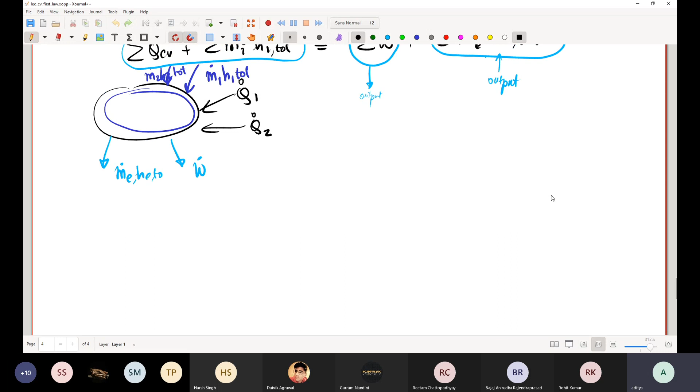Yes sir, visible. Okay, so yesterday we discussed the first law for control volume and mass conservation, which is trivial. So now we will move on to steady state processes.

Okay, so steady state processes, this kind of assumption is true for a majority of devices such as turbines, compressors, nozzles, boilers, heat exchangers, and so on. So what is the common theme for all these devices which operate at steady state?

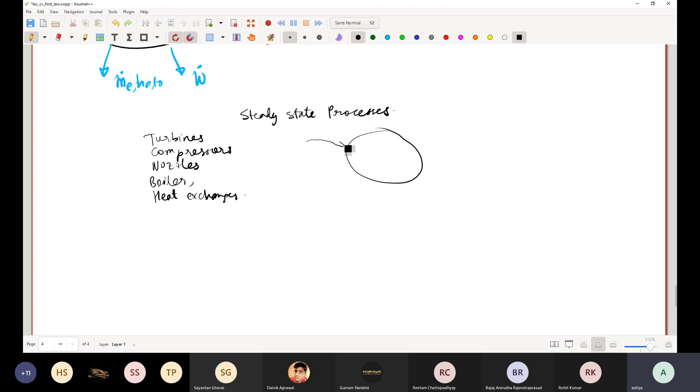There is some mass flux coming in, it could be multiple sources, and there is some mass flux going out, and these mass fluxes are constant. The mass fluxes are constant, meaning they do not change over time.

If they do not change over time, there will be no rate of change of mass in the control volume as well. If we say that something does not change in time, d/dt of that quantity will be 0. So in that case, we will say that the system is operating in steady state.

So imagine for a turbine, and we have seen this yesterday also. There is some mass stream coming in, there is some extraction, there is something which is going out, and these mass fluxes do not change.

For a turbine, it may change when, say, the power plant is shut down, for example. Okay, so there are a host of devices, and so we will have certain assumptions also built in.

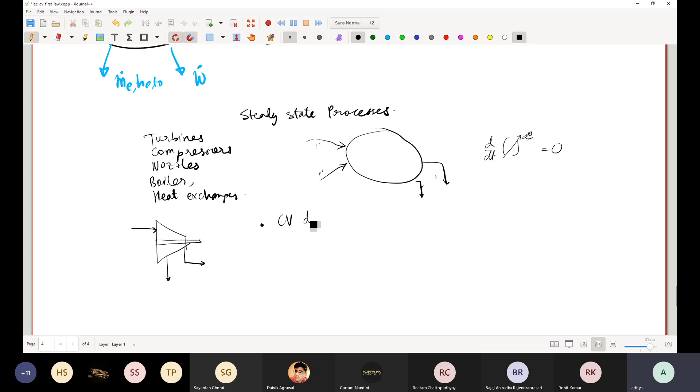You will see that in majority of the problems, the control volume does not move, mass inside the control volume does not change, and the mass fluxes coming in or going out of the control volume also do not change in time.

When these are sort of valid, then we say that the process is in a steady state, steady flow process. Also it's steady state, steady flow. SF is steady flow.

So steady flow is this assumption, because the mass of the control volume can also not change when the inlet flux and the outlet flux change in time, so that the difference is 0. This can also happen. So to avoid that extra ambiguity, we will have the third assumption also coming in, that is steady flow.

Okay, so let's do some examples. And as I said, the examples are really easy. I mean, the problems in all of this, they are very easy, but the only point is you must practice.

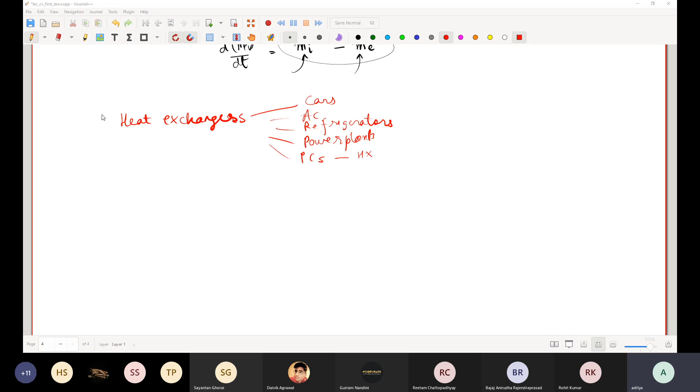So let me show you how it actually looks like. Let me just paste an image. A heat exchanger looks something like this.

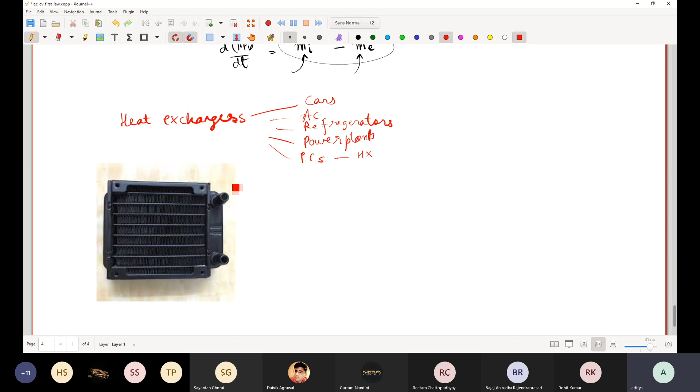So this is a kind of heat exchanger where hot liquid comes in, cold goes out. And how is the hot liquid cooled? By means of cooling air which blows over these fins. You will study it in heat transfer, that when you blow air over these fins, the air takes up the heat from the hot liquid and becomes hot.

But there can be different kinds of heat exchangers as well. This is what goes on in a PC, a personal computer. You have the CPU water block, and because of the heating of the CPU, the water inside the water block becomes hot.

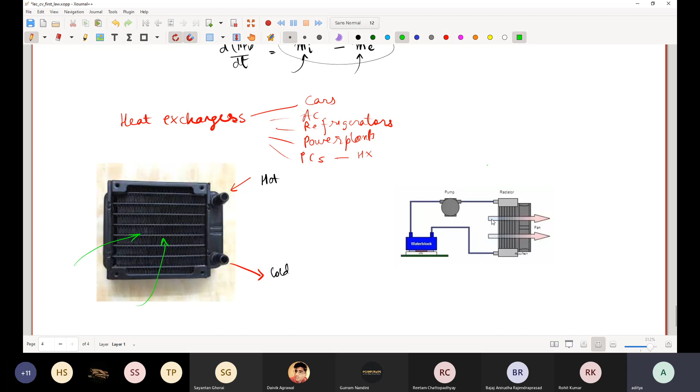So the pump simply pumps the hot water to the radiator, where a fan draws in air. It draws cold air, and because the cold air will pick up heat from the hot water, the air will become hot, but the liquid will become cool. Okay, this is how it looks like.

But here in both the examples we had air, but you can imagine that instead of air you could have cooling water as well. Instead of air blowing over this, you could have cold water coming in and hot water going out. So let me draw a schematic of it.

So you have cooling water in, and cooling water will flow in this space, where the tube isn't. This tube I have just shown schematically, like a coil. Cooling water will flow over the coil and exit. But hot refrigerant will go through the tube - this is the kind of tube you see at the back of old refrigerators. It will go in the tubes and exit. So what happens? The cooling water picks up heat from the hot refrigerant, and so the cooling water becomes hot, but the hot refrigerant becomes cold. It is as simple as that.

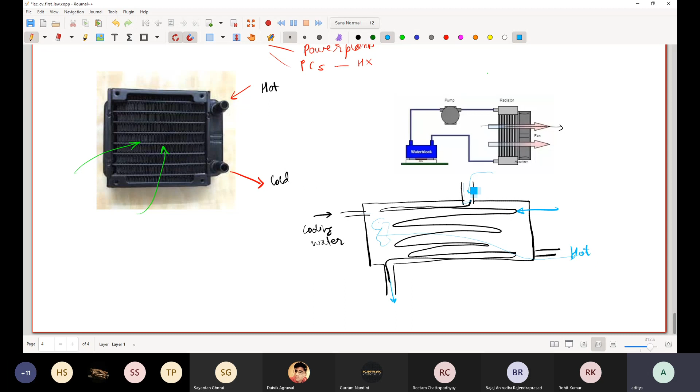So let's do a problem. Once we do the problem, it will be immediately clear.

Internally you have those tubings going on so that the two liquids do not mix. So in the problem, it is given that we have a water cooled condenser, in which R134A is the refrigerant, and the refrigerant enters the condenser at 1 megapascal, 60 degrees Celsius, at a rate of 0.2 kg per second, and exits the condenser as liquid at 0.95 megapascal, 35 degrees Celsius. The cooling water enters the condenser at 10 degrees Celsius and exits at 20 degrees Celsius. This is water, and this is R134A.

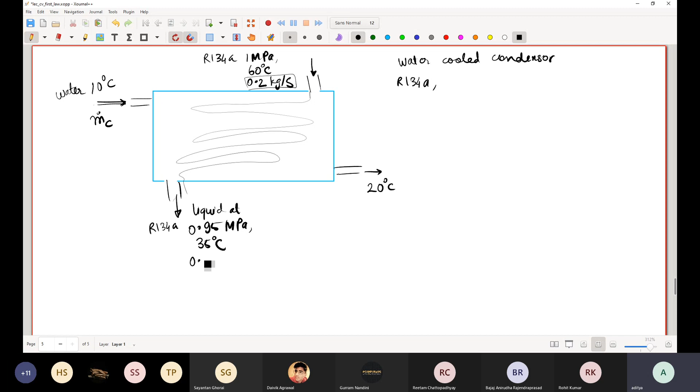So first things first, the mass flux of R134A in the system is going to be fixed. So whatever R134 is coming in at this section is the same flux going out. There is no reduction in mass flux because it's a single pipe, and that is why there will be no change of mass. Similarly, whatever mass flux of water is coming in is going to be the same mass flux of water going out.

Now let us consider this as the control volume. For this particular control volume, we can now write down all the different conservation equations. So first, conservation of mass.

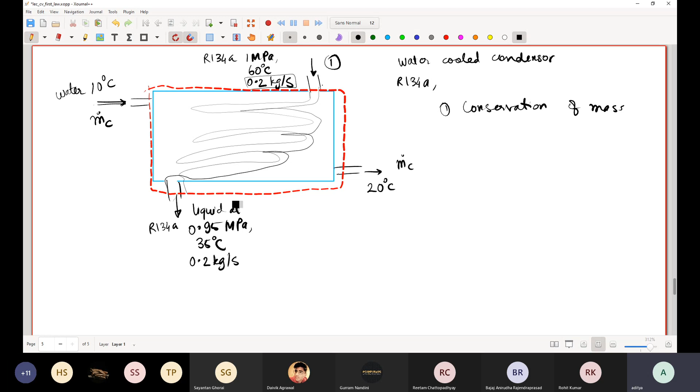Let me call this 1, let me call this 2, let me call this 3, let me call this 4. So m dot 1 minus m dot 2 minus m dot 3 minus m dot 4 is equal to dmcv/dt, but this is a heat exchanger, it's a steady state steady flow process, so this becomes 0. So what do we have? We have m dot 1 plus m dot 2 is equal to m dot 3 plus m dot 4, but... oh what have I done, this is all incorrect.

Conservation of mass I have written down, let me write it down. Mass in will be m dot 1 and m dot 3. So m dot 1 plus m dot 3 minus mass going out, which is m dot 4 and m dot 2, is equal to dmcv/dt, but because of steady state steady flow this will be 0. Therefore m dot 1 plus m dot 3 is equal to m dot 4 plus m dot 2. But we have already seen that because the pipeline of R134A internally is different from the pipeline of cooling water internally, m dot 1 will be equal to m dot 2, and similarly m dot 3 will be equal to m dot 4. So m dot 3, m dot 4, m dot 1, m dot 2 cancel out. So mass conservation is trivially satisfied. Mass conservation is trivial, no problem. Now with that in hand, we are in a position to write down the conservation of energy.

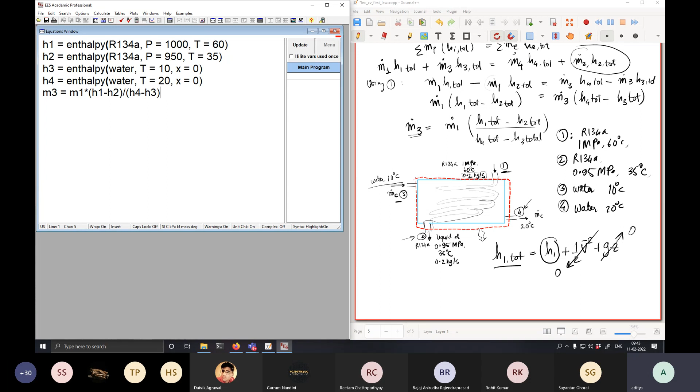So M3 will be M1 multiplied by H1 minus H2, divided by H4 minus H3, where M1 is given as 0.2 kg per second. Let me run this program. So M dot 3 comes out as 0.9191, and the answer matches exactly with the textbook. So this is the mass flux of cooling water that you must have in order to cool R134A from 1 megapascal, 60 degrees Celsius, to 0.95 megapascal, 35 degrees Celsius.

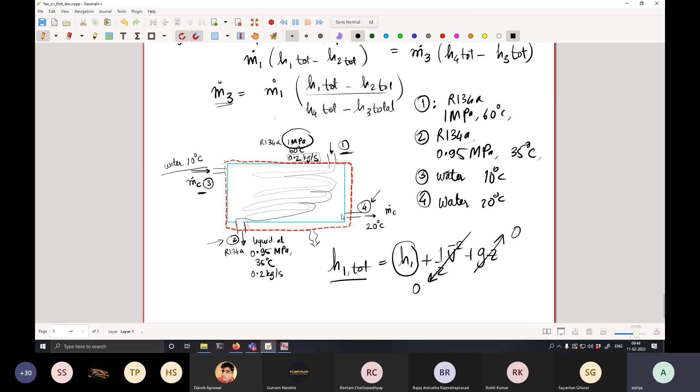Now look over here. Ideally, heat exchangers are devices where the pressure drop is negligible, and the pressure drop is in fact negligible. The pressure drop for R134A goes from 1 megapascal to 0.95 megapascal. So what exactly is going on? You are essentially losing out on 50 kilopascal. Why is that? Who can tell why we are losing pressure from 1 megapascal to 0.95 megapascal? You have essentially lost 50 kilopascal, which is not a lot, but why have we lost it? Anyone?

Viscosity? Yes, I mean it's due to the pressure losses because of the fluid flow within pipes. So essentially it's caused by viscosity.

Okay, very good answer. So this is the kind of engineering sense one must have when defining this. The longer the pipeline you have, the larger the losses you will have. That is why with heat exchangers, the designer has to account for the fact that when the liquid comes out, it will be at a slightly lower pressure. So that's what you do with heat exchangers.

Next, we have the nozzle. So let me tell you what a nozzle is. A nozzle is a static device which is simply a converging-diverging section. This is the converging section, this is the diverging section. This kind of nozzle you will find in jet engines, and many other devices as well, but most prominently you might have seen it in photographs of jet engines. So what is the task of the nozzle?

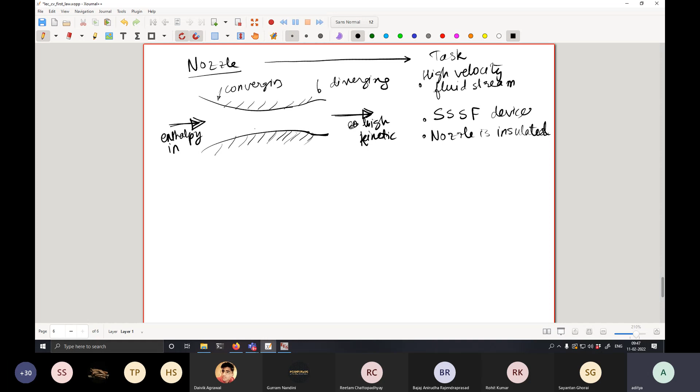And a nozzle is typically insulated unless otherwise specified. There might be problems where you have a non-ideal nozzle and there is some amount of heat transfer from the nozzle to the surrounding. In that case, you must be in a position to appropriately modify the first law of thermodynamics to account for that non-ideality. Let us consider this as the control volume.

So first things first, mass conservation. What about mass conservation? Is it ideal? Is it trivial? Yes, it is trivial. Why is it trivial? Because there is only one mass coming in, m dot i, let's call it, and this is m dot e. So m dot i simply is equal to m dot e because it's a steady state, steady flow process. Is that clear to everyone? Mass conservation is trivial for a nozzle.

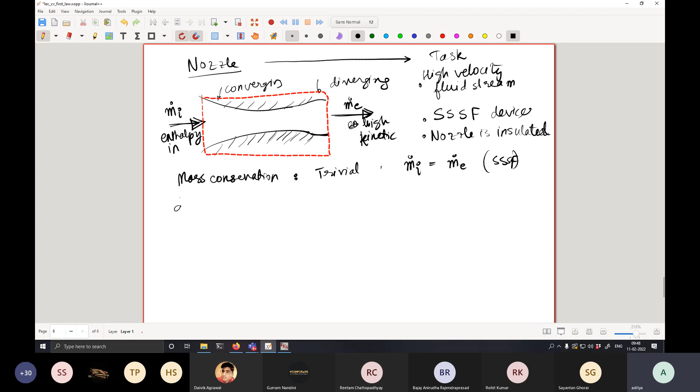Now let us write down the first law of thermodynamics. So we have dE_CV/dt is equal to the summation of all heat fluxes minus the summation of all works plus the summation of all inputs bringing in total enthalpies minus the summation of all exit masses taking out all the total enthalpies. Because it's a steady state, steady flow process, this vanishes, this vanishes.

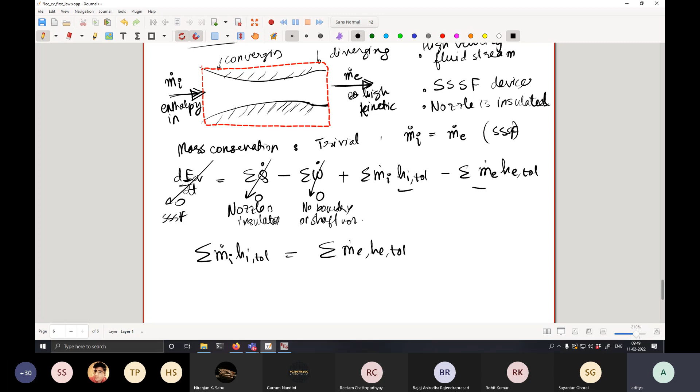So essentially you are left with 0 equals this minus this. So much like the heat exchanger, summation m dot i h_i,total is equal to summation m dot e h_e,total. This was the same case for the heat exchanger as well. But here there is only one mass stream, so you will say m dot i h_i,total is equal to m dot e h_e,total. But we have already seen that because there is only one inlet and exit, mass conservation is identically valid, so m dot i and m dot e are equal, they cancel out, leaving us with h_i,total is equal to h_e,total. This means the incoming total enthalpy is equal to the outgoing total enthalpy.

Now what is the incoming enthalpy? It will be h_i plus half v_i squared plus g*z_i, and the outgoing enthalpy will be h_e plus half v_e squared, where these v's are the velocities, plus g*z_e. Now because the change in potential energy in going from the inlet to the outlet is negligible, we can simply cancel these out.

So these terms are cancelled because the change in specific potential energy is 0. The change is 0 - I'm not saying the absolute value is 0. This nozzle could be at a very high altitude, and correspondingly it can have a very high potential energy. But during the process, going from inlet to outlet, the change that the fluid experiences will be equal to 0. Therefore we can cancel out these two terms.

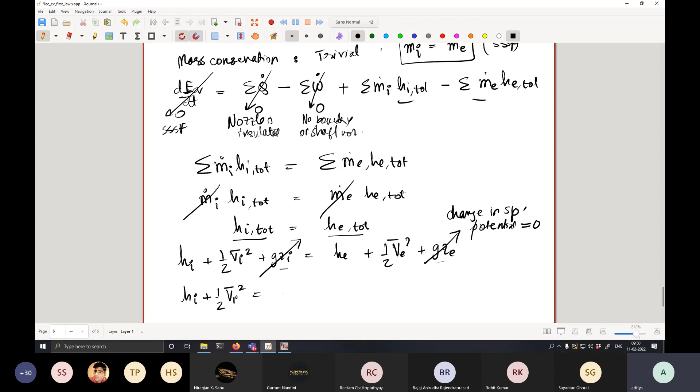So we have hi plus half vi squared is equal to he plus half ve squared. That is the entirety of the derivation for a nozzle. This is what you will use for a nozzle. Let us do a small problem.

The problem states the following: steam, so this is the inlet line and that is the outlet line. The incoming line has steam at 0.6 megapascal and 200 degrees Celsius, and it enters into an insulated nozzle. This nozzle is insulated, it is given in the problem. And it exits.

The question is, determine the final temperature. It is given that the exit velocity and the exit pressure are this. The question is, what is the final temperature, if the steam is superheated? So first of all we have to find out the final temperature. The second part of the question we will come to later on.

Okay, so hi plus half vi squared - vi we have over here. So let's do that. A word of caution: this is the place where many of you might make a mistake. When using units, hi, the unit is what? Kilojoule per kg, isn't it?

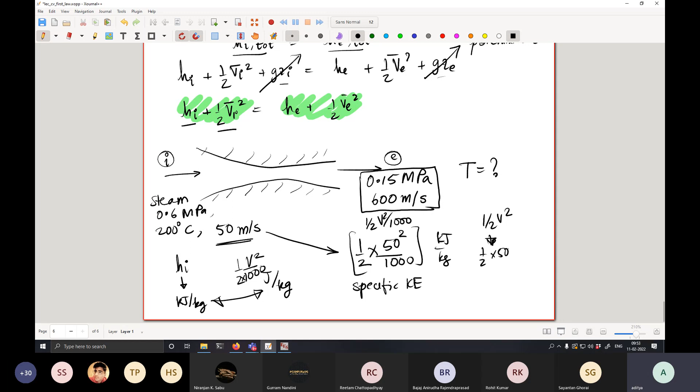So in this case, the specific kinetic energy will be half into 50 squared over 1000. This is the specific kinetic energy, and the units of this now are kilojoule per kg. But if you only use half v squared, you would have half into 50 squared, and the unit of this would be joule over kg. So if you try to add something which is kilojoule over kg with joule per kg, you are going to get incorrect answers, solely because there's a factor of 1000 missing from either of the terms.

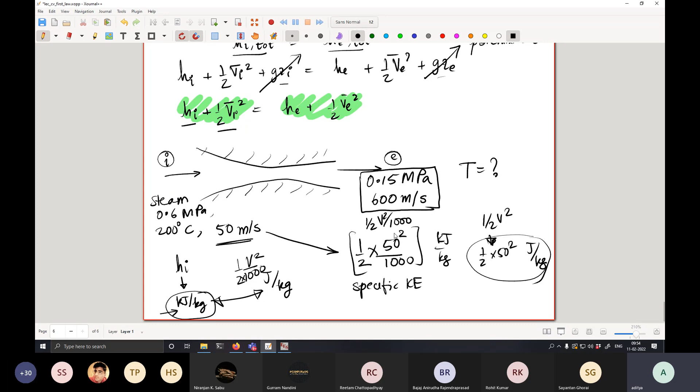Either you can convert this to joule per kg, which is not so convenient because all the other quantities in the tables will be reported in kilojoule per kg. So it is worth your time to convert the specific kinetic energy head into kilojoule per kg rather than doing anything with the specific enthalpy units. Is that clear, everyone? It's simple, but I just thought it needs to be said. Most likely many of you might have figured it out as well. Is that clear?

Yes sir. So hi plus half vi squared over 1000 is equal to he plus half ve squared over 1000, where hi is at 0.6 megapascal, 200 degrees Celsius. This vi is 50 meter per second. He I don't know. Ve is 600 meter per second. So let us plug in the numbers and let us see what he is.

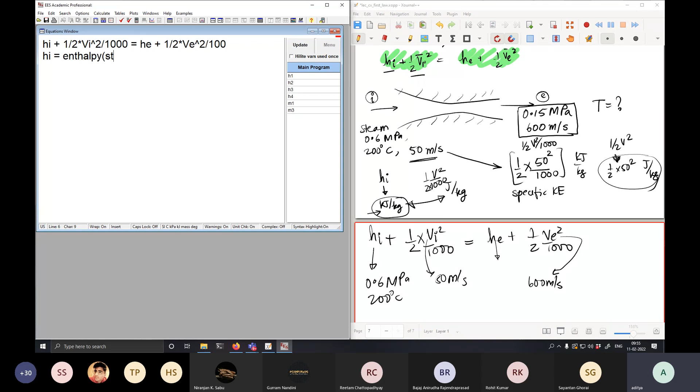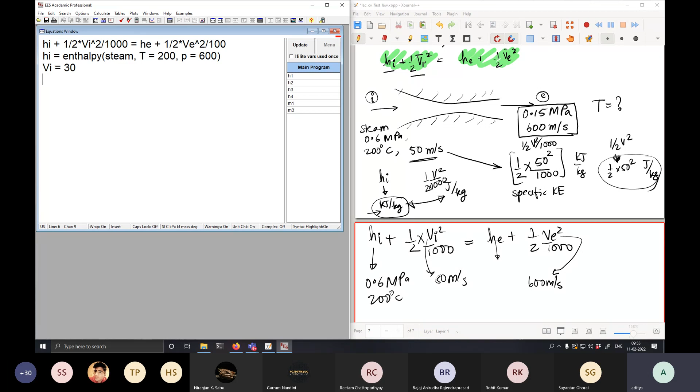Okay, so I will say hi plus half into vi squared over 1000 is equal to he plus half into ve squared over 1000, where hi is the enthalpy of steam at T equal to 200, P equal to 600, and vi is going to be 50 and ve is going to be 600. So let us run this. So we get an exit enthalpy of 1051 kilojoule per kg.

It is also given that the outlet state is at 0.15 megapascal, so the exit pressure is 0.15 megapascal. We have already seen in chapter 5 that enthalpy and pressure can be used as two independent quantities to determine the other properties.

Sir, I think you divided by 100 instead of 1000. Ah, thanks for pointing it out, let me just make amends over here. Sir, also is Vi 30 or 50? Wasn't it 30? Oh, it was 50, my bad.

I'll just change it. No problem.

So the exit enthalpy is 2672. Let's write it down: 2672 kilojoule per kg. Good, at least you're attentive. You're more attentive than me. That's always a big plus.

Okay, these are the exit quantities that we have. Like I said, we can use enthalpy and pressure to determine any other property that we want, like specific volume, temperature, internal energy, if one were inclined to find that. So now we will find the exit temperature. T exit is the temperature of steam at H equal to 2672 and P equal to 150. Let me run this. So with this, we obtain an exit temperature of 111.3 degrees Celsius. So the final temperature is 111 point this.

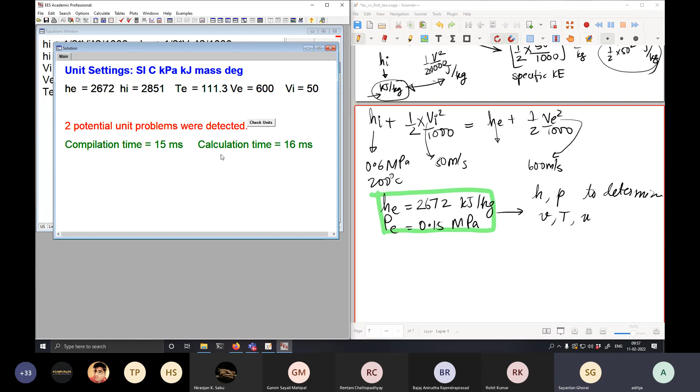Check the difference. Sir, I have a doubt. In this case, it is mentioned that it was steam, like we know its quality is one. No, we don't know the quality is one. Nowhere have we assumed that the quality is one. I thought it was, and that's why I got an ambiguity. No, there is no such assumption. We have never said it's superheated or subcooled or saturated. Let's see, if you have a doubt, let's check.

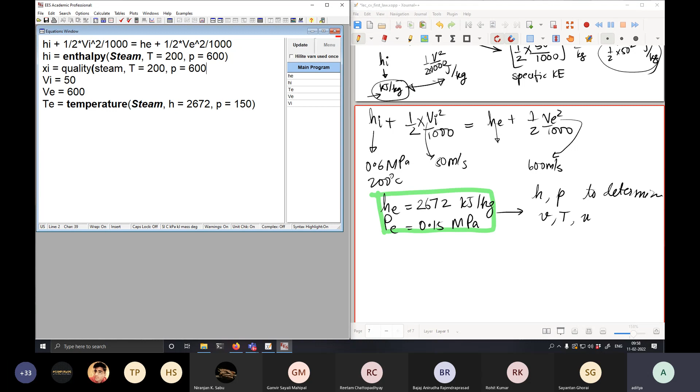Quality steam, T equal to 200, P equal to 600. Let's see what state it is. So the incoming quality, Xi, is 100, meaning it is superheated steam.

Hello, sir, but the outgoing is not matching. I checked at P equal to 150 and X equal to 1, the enthalpy comes out to be a little bit different.

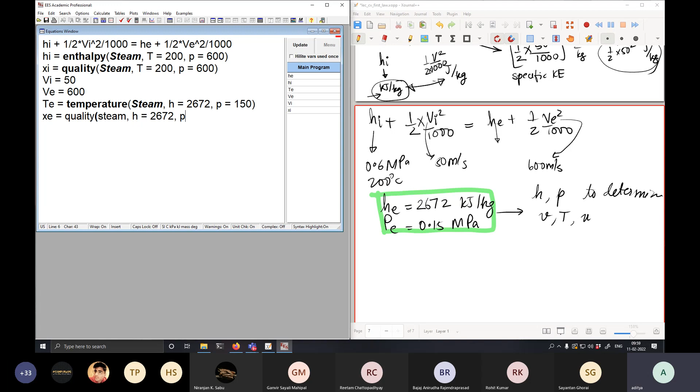Let's see what the outgoing quality is. So the outgoing is 0.9905. So it's just at the saturation point. Yes, sir, one moment.

Yeah, hello. Sorry about that.

So the exit quality is very near to the saturation dome, and in the book also it is given as 0.99, which is correct. Hello, Sayantan, yes sir, it is clear. For everyone else, regardless of what value you get, it's just a matter of what the internal offset of the software is. Don't worry about absolute values ever. To everyone, you should get 0.99.

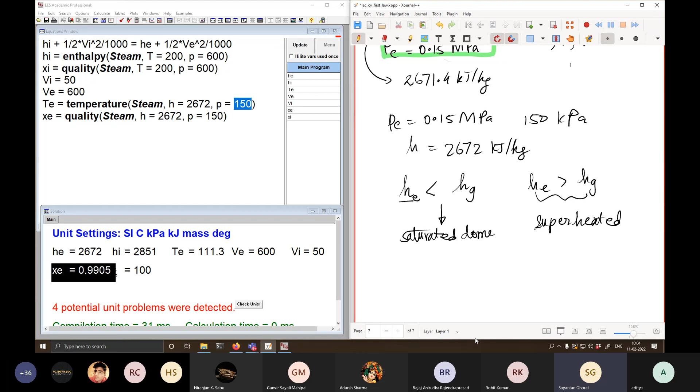Sir, I had a doubt not related to thermodynamics. How does this EES work? It is not following the normal flow of code. In the previous problem, you followed a pattern, but the value was calculated in the end, while the formula was used before that. So it compiles everything afterwards, it doesn't interpret line by line. It takes all the variables, it sees what all things it needs to solve. In fact, there is something even funnier that it does.

Let me show this, it's just for fun. You should not do it because things may go wrong, you should not do all this, whatever I'm trying to show you. So, suppose h temp is 2672. Then I say h temp equal to enthalpy of steam at T equal to T unknown, P equal to 150.

Ideally, it should be able to solve this as well. No, no, no, no. Oh, I see where the error has come. T and P I'm trying to fetch to get enthalpy, but T and P cannot be used simultaneously inside the saturated dome, so it throws an error. But had it been in superheated, let me just put this, then it would give some answer. But the property is probably incorrect, so I need to go to a lower pressure maybe.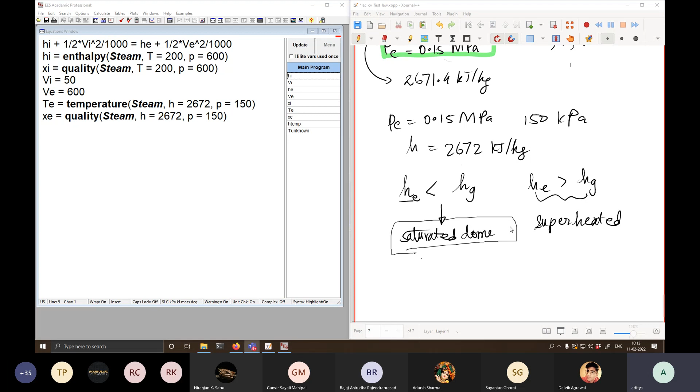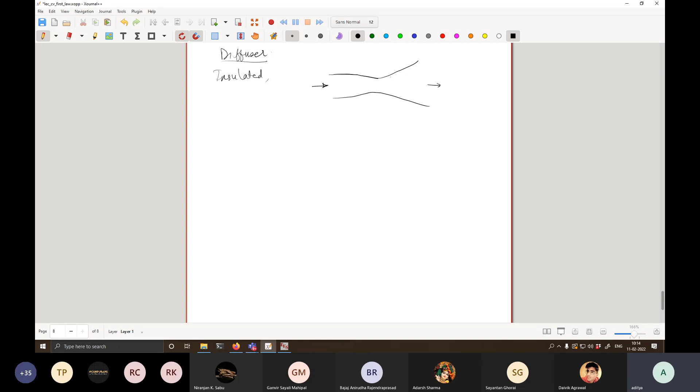Okay, we're back. So then a diffuser is a similar item where you have a converging section and a larger diverging section. It's the reverse of a nozzle. So diffuser is also insulated, and it makes use of the fact that high kinetic energy is coming in and you want to convert it into enthalpy. This kind of thing you will also see in jet turbines, but the analysis remains the same. So the next thing, we'll not discuss problems of this, it's very simple, it's the same idea as before. So throttling.

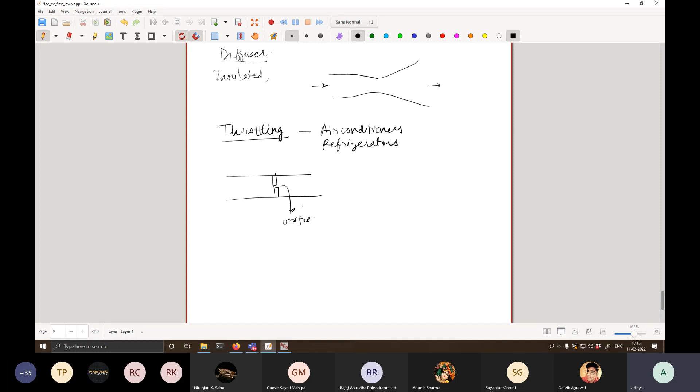Throttling is a very common process in air conditioners or refrigerators. It's very simple in the sense that in the tube you will have a small orifice. This is the orifice. And if we imagine this to be the control volume...

If you imagine this to be the control volume, the process of throttling happens so fast that there is no chance for the refrigerant, which is entering at a certain enthalpy, to lose heat to the surroundings. The throttle valve is also packed with thermocol, so it's insulated. So the throttle is insulated.

Also, during this process the upstream velocity - look at this, I have not drawn the control volume very close to the orifice, I have drawn it far, close to the control surface and rather away from the orifice. At the inlet control surface and at the outlet, the velocities are the same. Why are the velocities same? Because the mass flux is still maintained. So when the velocities are same, rather let me put it this way, the difference in specific kinetic energies is negligible. In that case, the enthalpies will remain constant.

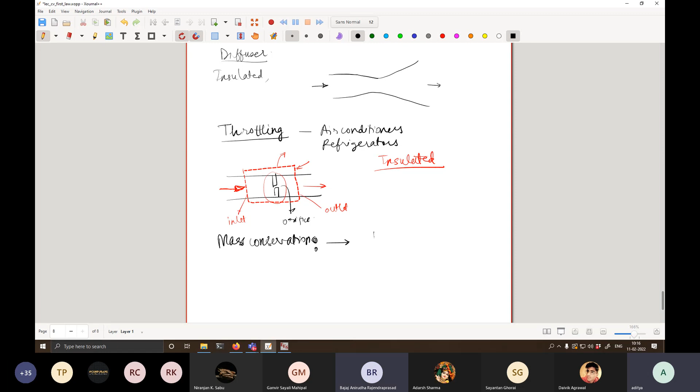Let's derive this. So mass conservation - what is mass conservation again? Is it trivial or not? Only one inlet, only one exit. Is mass conservation trivial? It is trivial. And it's also a steady state, steady flow device.

So we have dECV/dt equals summation q dot minus summation w dot plus summation m dot i hi total minus summation m dot e he total. There is no heat transfer, there is no work done. It's a steady state, steady flow device. So again you end up with the same formula: m dot i hi total is equal to m dot e he total.

So let us write down the expression for this, and mi and me they cancel out because from mass conservation we would have m dot i equal to m dot e. So by virtue of this, these two terms cancel out. So hi total will comprise of hi plus half vi square plus gzi, and he total will comprise of he plus half ve square plus gze. Now there is no change in specific potential energy and no change in specific kinetic energy, so these terms cancel out. They are not negligible, they cancel out, meaning the change is zero.

I have not cancelled them individually, I have cancelled them in pairs because half vi square will be approximately equal to half ve square. There is a difference - I hope everyone is able to understand that. I am not saying half vi square is equal to zero, I am saying half vi square is approximately equal to half ve square. That is why I have cancelled them out.

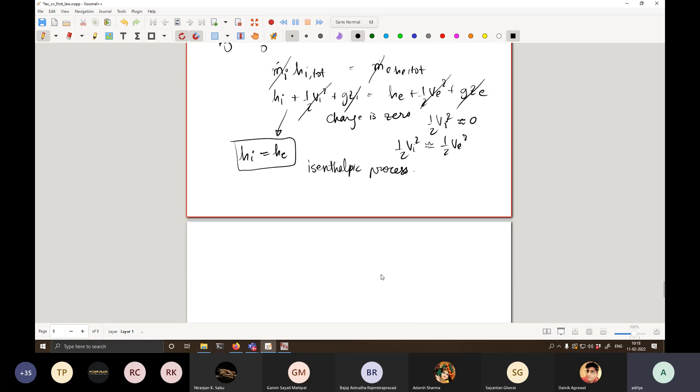It's very simple. So with that in mind, let's do a simple problem. So we have a capillary tube throttling device. It's also called an expansion valve, and in refrigerators it's also called a capillary tube. Basically it has a very small diameter, so it's an expansion valve or a capillary tube as well. So what is given?

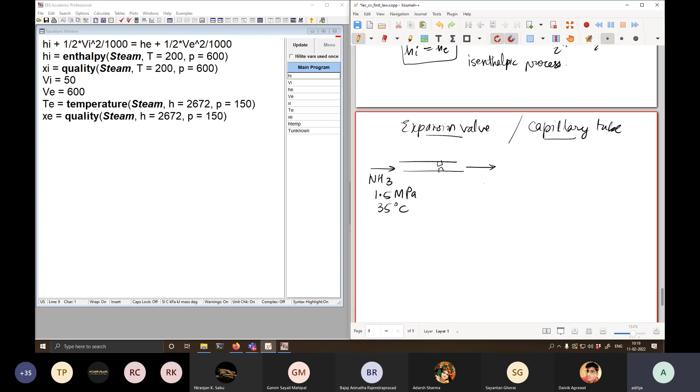In this you have ammonia as the refrigerant, which enters the expansion valve at 1.5 megapascal and 35 degrees Celsius, and it exits the expansion valve at 291 kilopascal. The question is, what is the quality of ammonia going out? Let's see how we can do it.

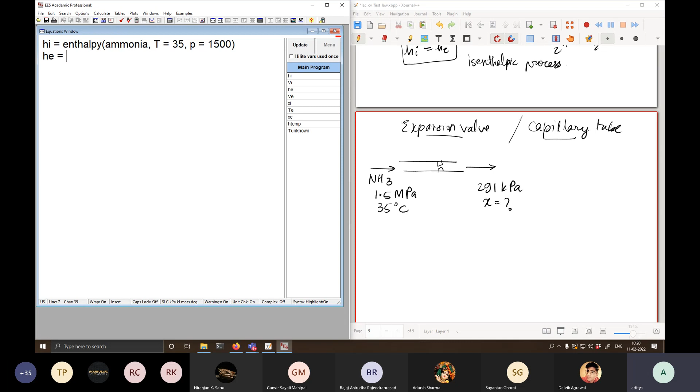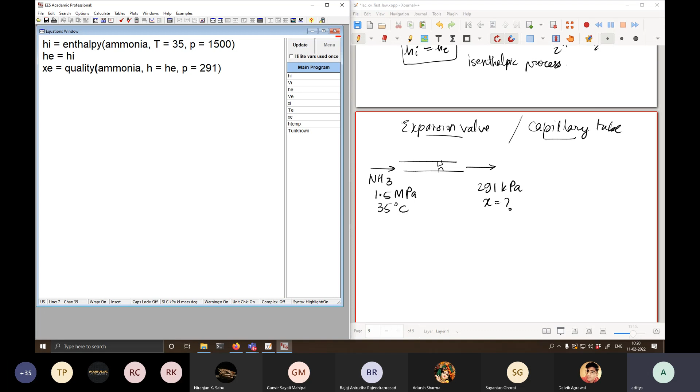It's very simple. So we will say HI, the incoming enthalpy, is the enthalpy of ammonia at T equal to 35 and P equal to 1500. We will say HE equal to HI because the exit enthalpy equals the incoming enthalpy. Finally, X exit is the quality of ammonia at H equal to exit enthalpy and P equal to 291 kilopascal. When we run this, we obtain a quality of 0.1636. So the quality unknown is 0.1636, and the answer given in the textbook is 16.38%, which is fine - fourth decimal place we have some difference.

The problems of expansion valves are as simple as that. They are isenthalpic processes, that is, the enthalpy upstream and downstream remain the same. Any doubt in this so far?

No sir, so I have a doubt in the concept. The orifice is very small, but still velocity is remaining unchanged. How is it?

I'm not understanding. No, so the design of the capillary tube or the expansion valve is done in such a way that the velocity remains constant. You don't want large changes in velocity in the system. In a refrigeration system, you design everything so that the velocity tends to remain constant. Otherwise you will have fluid pressure drops. Differences in velocities cause drops in pressure. So during the designing of the process, it is always ensured that the inlet incoming and outgoing velocities are the same.

I'm drawing it as a very simple orifice, but in reality it's a coil of capillary. The length and the diameter are chosen appropriately so that the velocities remain the same.

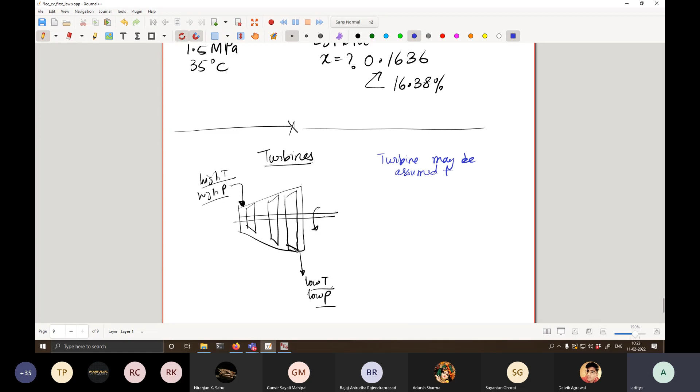to be insulated as well. In many cases it will be given that the turbine is insulated, meaning there is a layer of insulation so that it doesn't lose heat. Why do you want the turbine to not lose heat? Because losing heat means whatever output you could have obtained, part of it is converted to heat and lost to the surroundings. So the potential work done that you can get, that will get reduced. So in order to avoid that, it is also kept insulated.

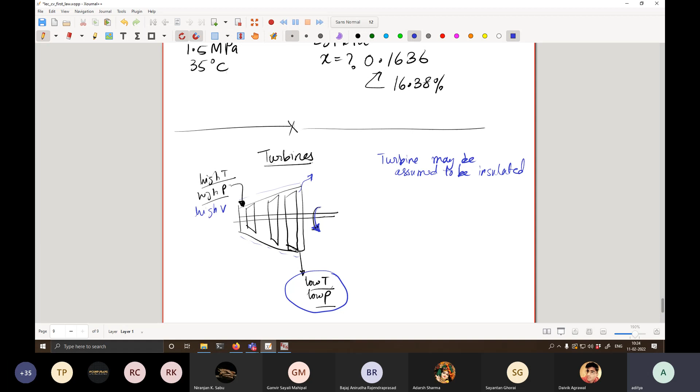It's a kind of rotary device, and typically you have high temperature high pressure coming in and low temperature low pressure going out. This is what the entire situation is. So the questions will be, what is the work output of a turbine, for example? And apart from having high temperature high pressure, it also will be high velocity coming in, and low velocity going out.

Okay, so let's do a problem. It will become very clear through the problem what the entire analysis of a turbine looks like. Okay, that's a very poorly drawn turbine.

Okay yeah, this is a good turbine. This is the output shaft. So the incoming, let me draw it in magenta.

It is given that for this turbine, the mass flow rate is 1.5 kg per second of steam. It is given that the incoming pressure is 2 megapascal, the incoming temperature is 350 degrees Celsius, the incoming velocity is 50 meter per second, and also the potential energy or the height is at 6 meters. So this is Zi, this is Vi, temperature, pressure, mass flux.

At the exit, the state is given as... so what is mass conservation in this case? Is it trivial or not? Is mass conservation trivial in this case? Yes, I think because there is one inlet and one outlet. Very good, so there is only one inlet, one outlet.

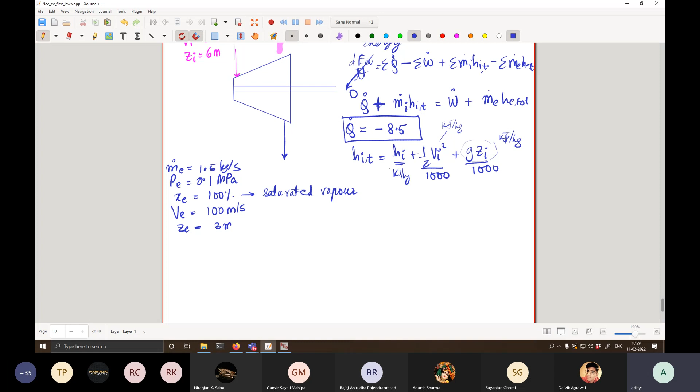Remember this. So what is hi total? Let's find it out. Ideally, you would not calculate each of the terms separately, so let us find only hi. It is the enthalpy of steam at P equal to 2000, T equal to 350. Let's find it out. So hi is 3138.

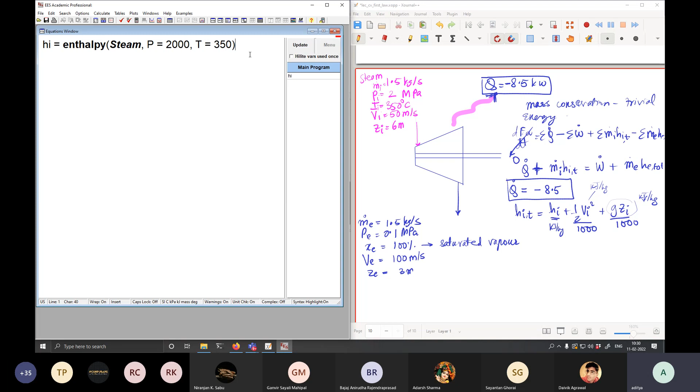Let's find out what half Vi squared is. So KEi, the specific kinetic energy at the inlet, is half into Vi squared, which is 50 squared divided by 1000. So when we run this, what do we observe? The kinetic energy incoming is very small, very small compared to the enthalpy. Are you able to appreciate this fact?

Yes sir. Moreover, the potential energy at the inlet is going to be 9.81. If I consider this height to be from some absolute value at z equal to 0, it will be times 6 over 1000. So the potential energy contribution is even smaller. That is why we say that for the inlet to the turbine, the dominant contribution is mostly through the enthalpy only.

Okay, regardless, so hi total is equal to hi plus kinetic energy i plus PEi. Now, what is the exit condition? he is equal to enthalpy of steam at P equal to 100, x equal to 1. Kinetic energy at the exit is half into 100 squared divided by 1000. Potential energy at the exit will be 9.81 into 3 divided by 1000.

Okay, so whatever I just did for a turbine, the reverse is true for a compressor. A compressor is a similar device, fundamentally speaking it's the opposite of a turbine. So it's not really worth our time to discuss how a compressor analysis is done, it's exactly the same as above. A compressor takes in stuff at low pressure, low temperature, and the output is high pressure, high temperature. But the analysis is going to be the same.

And finally we come to a slightly complicated problem. Oh no, the problem we will do at night. If anyone interested can look at the recording. We will now cover the last part of chapter 6, that is the transient process.

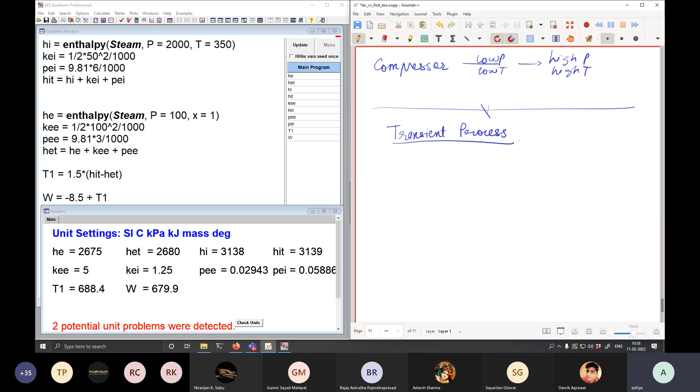Transient process. So whatever we have studied so far, that falls under the classification of steady state, steady flow device, right? And you may think that there could be many processes where it's not steady state steady flow, and it is true, but the number of devices which operate as a steady state steady flow device is very large, and that is why all the previous analysis are very important. But a transient process is also very legitimate.

For example, in an oxygen filling plant, you have these bottles. This is a very poorly drawn bottle, and you want to charge it with oxygen. The tank becomes empty and there is a small valve, so you connect it to a pipeline. That pipeline is containing oxygen, and continuously oxygen is coming in, oxygen is going out. When you open this valve, then this tank, which originally has no oxygen, will get filled with oxygen, and then you close the tank.

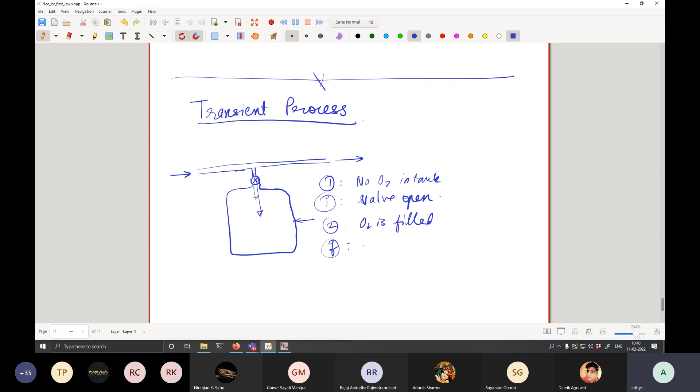So this kind of process where you have state 1, no oxygen in tank, then intermediate step, the valve is open, then step 2, O2 is filled in tank, then final step, valve is closed. For such kinds of processes, one must undertake a transient analysis.

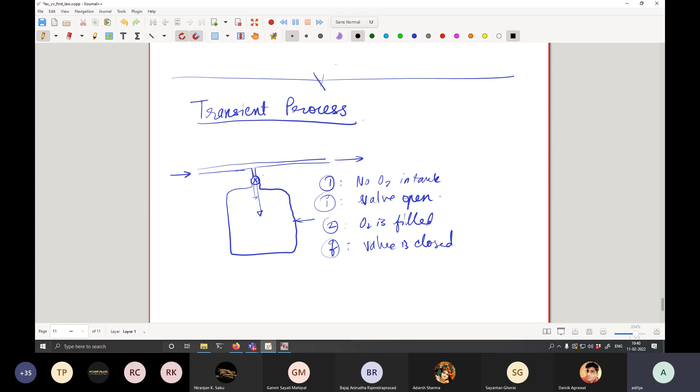Okay, so let us first look at the derivation of a transient analysis. The starting block is the first law for a control volume, and then we will do certain things, and it should be obvious what we're going to do. We will integrate it in time. So first of all, mass conservation. First things first is mass conservation: dmcv/dt is equal to summation of m dot I minus summation of m dot E.

Okay, this is the conservation of mass. Let us integrate this in time. So what do we have? Integral of dmcv/dt is equal to integral of summation m dot I dt minus integral of summation m dot E dt. So what does this become in going from state 1 to state 2?

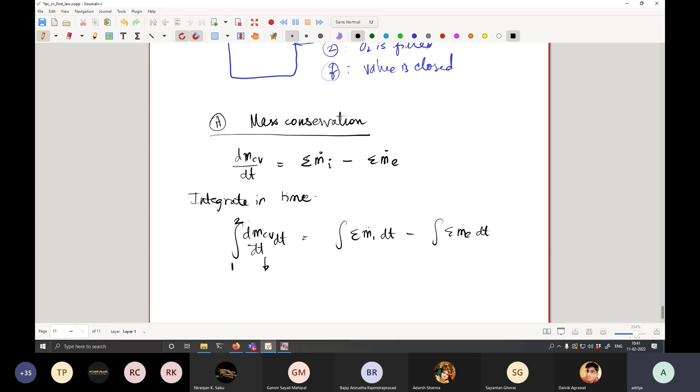So in going from state 1 to state 2, it will simply be mCV at some time 2 minus mCV at some time 1.

Okay, and when you integrate the mass flux over time, you will simply get summation m dot i minus summation m dot e, meaning you have taken whatever the mass flux is and integrated in time. But if you imagine that over that time, going from time 1 to time 2, if the mass flux is constant, then this will be m dot i multiplied by delta t, and this is simply all the mass that has come into the system. This will be all the mass that has come into the system. Okay, this is important.

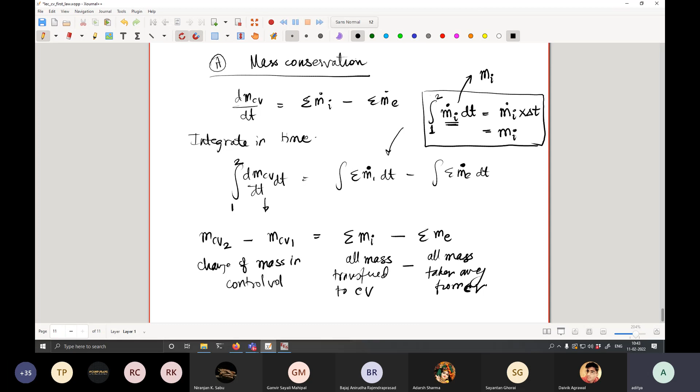Even if you don't assume that m dot i is constant, this will be equal to some average mass that has come into the system. So change of mass in the control volume will be equal to all mass transferred to the control volume minus all mass taken away from the control volume. Is that okay, guys? If you have any doubt, you ask. I can explain this again if you like. Let me pictorially draw it, then it will be clear.

Suppose in time, I am looking at the inlet mass flux, and suppose it is constant. This is m dot i. So what is the total amount of mass that has come in? It is the integral of m dot i dt going from time 1 to time 2. So it will be the area under this curve, and it will simply be m dot i multiplied by T2 minus T1, that is delta T, and this I will call Mi, all the mass that has come into the system.

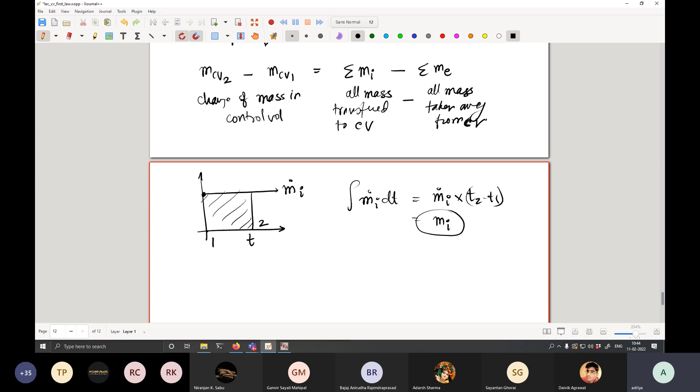Now alternately, I can say that during the process m dot i can fall, it can go like this. Okay, it can fall, no problem. So this is how m dot i varies in time. These problems are significantly more complicated. So typically what you say is integral m dot i dt. Here you cannot simply write it as m dot i into delta t. Why can you not write this? Anyone? Why can you not write this for this red curve? Because it's not parallel to the x-axis. Yes, because it's a function of time and we cannot simply perform the integration.

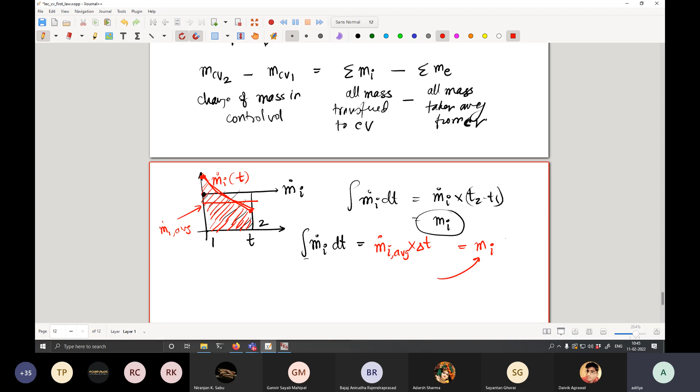But I can simply say it is equal to m dot i average times delta t, meaning I am effectively taking the average of this m dot i, say this is that. So this is m dot i average, and then I multiply by delta t, and effectively I got Mi. So this is the area under this curve now. Okay, and that is all the mass that has come into the control volume. It's nothing more than this, just all the mass that has come into the control volume.

Okay, so essentially the statement still holds that this is the change of mass in the control volume, and the change of mass in the control volume has been affected by all the masses that have come into the control volume minus all the masses that have exited. There is no rate anymore. Okay, now is it clear to everyone?

Sir, actually I don't think that averaging is required, because dmCV by dt into dt will simplify to dmCV, so it will be simply m2 minus m1.

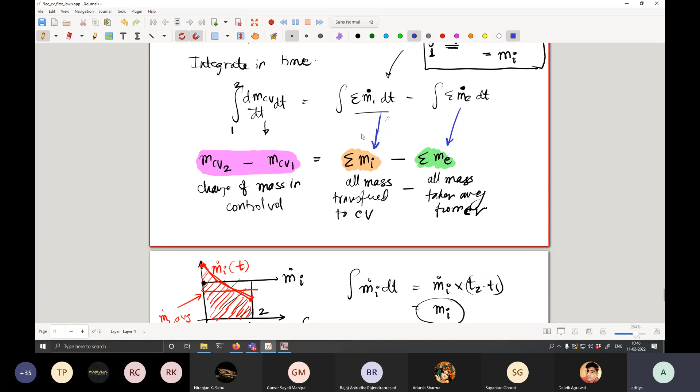That is true, what you said is true. But what I was deriving is for this particular term, this and this. Okay sir, this is true, this is straightforward, there is nothing to do in this. These are the incoming mass fluxes integrated over time. This analysis is for integrating fluxes over time. Is that clear? Yes sir, it's not the first term, it's the second term.

Okay, now we move on to the conservation of energy, and it's going to be a similar thing. So we have dECV/dt equal to summation of q dots minus summation of w dots plus summation of m dot i h i total minus summation of m dot e h e total.

Now you integrate it in time. So what you get from the first term, integral dECV/dt dt, is ECV2 minus ECV1. Okay, when you integrate the second term, integral summation of q dot dt, it will simply be the summation of q's, meaning in going from time 1 to time 2, all the heats that have been transferred are being accounted for over here.

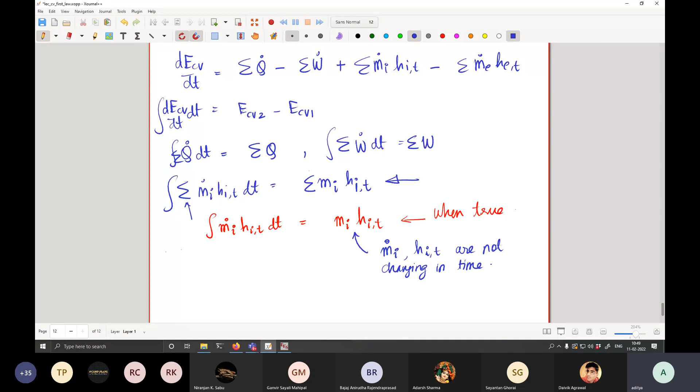So otherwise, why should mi dot remain constant? It does not have to remain constant. But in the processes, we will assume that it will remain constant unless otherwise specified. You can have a process where mi dot is not constant.

In fact, when you try to fill air into your bicycle tire with the help of a pump, initially there is no air in the tire, so initial mi dot will be higher than what the mi dot will be when the tire is partially full.

Then nothing else, this integration will only become complicated. So I must also tell you how mi dot is varying in time. Otherwise, I will not be in a position to do this integral at all.

Now there is no guarantee this will also remain constant, because when you are pumping air, this tube slightly becomes hot. So hi total will also slightly increase. Even the pressure will also change, sir. So back pressure is also changing, sir. So a lot of things are changing.

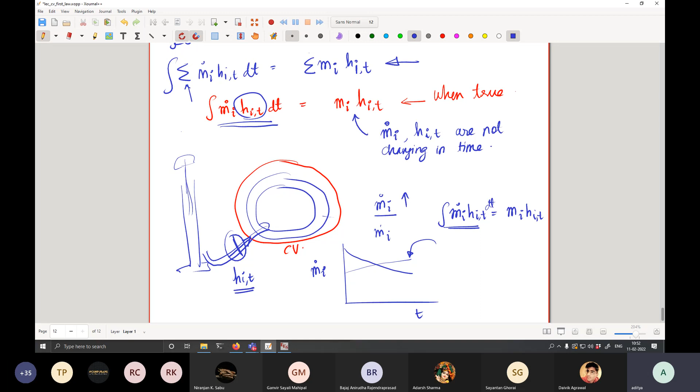So what's the difference between the two? See, there are subtleties. m dot denotes the flux, it is because of some mass crossing a cross section. dm dt, that we have used so far, is the rate of change of mass in a fixed volume.

M dot is not a fixed mass, so when you do m dot dt, it is as if you're trying to figure out how much mass has crossed this area. Now, if m dot is fixed, no problem. If m dot is a function of time, as we discussed, you have to appropriately put that function of time and then integrate this. dm dt can also be a function of time, but why would you do that?

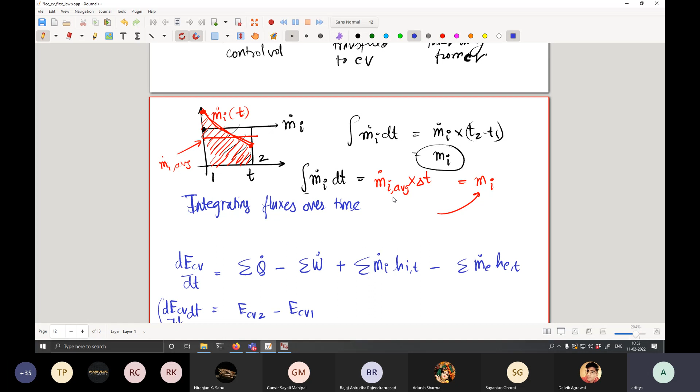I can say that initially there is a process where the mass flux in the system decreases hyperbolically, meaning m dot is some constant over time plus some other constant, so that at t equal to 0 it doesn't become singular. I can say something like this.

So then in going from time 1 to time 2, what is the total mass? Integral m dot dt going from time 1 to time 2. So this will be a over t plus b dt, and this will be equal to a log of t2 plus b over t1 plus b. So this is that integration.

So you cannot say this is dm dt. But when you analyze the control volume mass, it's already in this dmcv dt form. It doesn't matter how the process looks like. This particular integration for the mass flux depends on how the process looks like. It depends on the path taken — it's a path integral.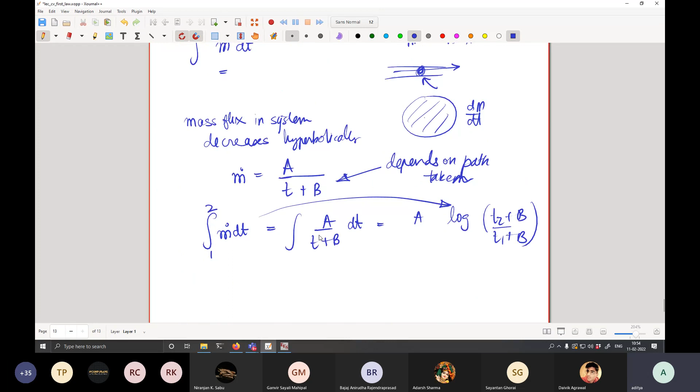From mathematics, if you recall, it's an imperfect integral, this one. But this is a perfect integral — dmcv dt dt, it's a perfect integral. It does not depend on the path taken. Is it clear what I said? This is a perfect integral.

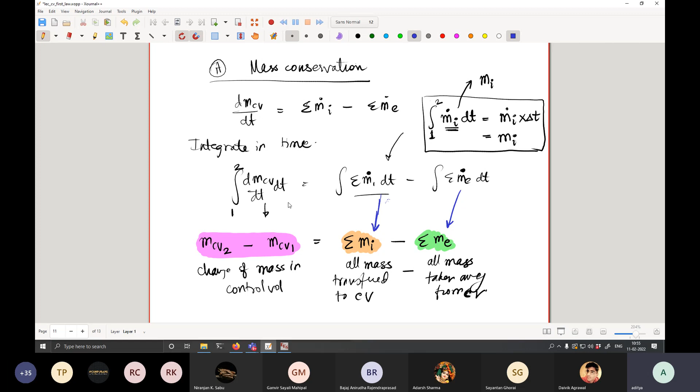You look at it from a holistic viewpoint. Don't try to recall from memory. Okay, so this then also boils down to — let me just grab hold of this.

When you integrate this, eventually you get ECV2 minus ECV1 equals sum of all the heat transfers to the system minus sum of all work done by the system, plus approximately sum of MI HI total minus approximately sum of ME HE total.

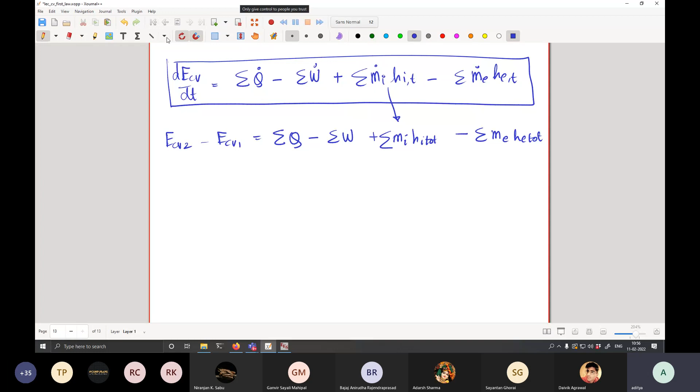Let's do a quick problem so that there is no doubt in anyone's head. Very standard problem.

There is a valve, and it is given that in this pipeline steam flows at 1.4 megapascal and 300 degrees Celsius. Steam is flowing in a pipe — this pipe is part of a big pipeline, but steam will always be flowing at 1.4 megapascal, 300 degrees Celsius. It's like a big plant where steam is generated, so filling small cylinders like this will not create any changes in the pipeline. Have I made myself clear?

What is the ramification of this statement? The ramification is that this particular state will not be affected anymore, so HI will not change — HI will never change. If I were to connect steam from a container to another container, then HI would change. I will discuss this later.

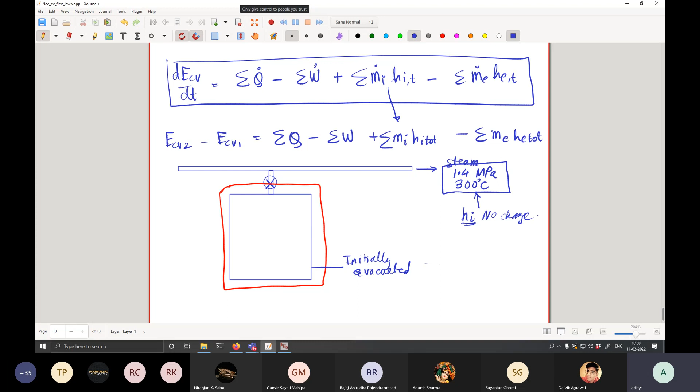Okay, so let's draw the control volume. This is the control volume. So what is the problem? The valve is opened. This tank is initially evacuated — there is nothing in the tank. Finally, when the valve is open, the final state is steam exists at 1.4 megapascal. This is all that is given.

When the valve is open, steam will go from the pipeline to the tank, and the pressure will reach 1.4 megapascal. It is also given that the filling process is adiabatic, meaning there is no heat transfer, and the kinetic and potential energies are negligible. So how do you solve this problem?

First things first. Sir, what is asked? What do you have to calculate? We have to calculate the final mass of steam — no, final temperature of steam. We have to find the final temperature of steam.

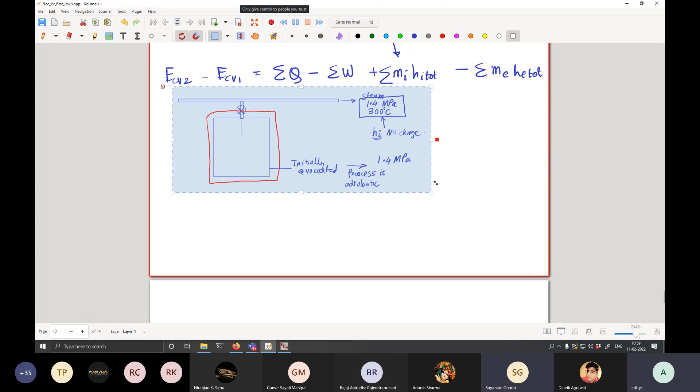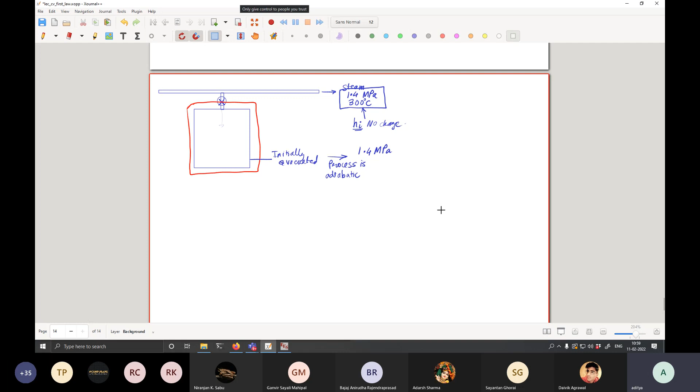Now you might be tempted to say that it's going to be 300 degrees Celsius, because it's connected to the pipeline, but no — it's not a closed chamber, it's an open system. Here steam is constantly flowing. So first things first, conservation of mass. You always take it step by step.

mCv2 minus mCv1 is equal to all the incoming mass minus all the outgoing mass for this red control volume. What is the initial mass in the control volume? Zero. It is 0. So mCv1 is 0.

Is there some mass coming into the control volume? Yes, sir. When the valve is open, this term will exist. Is there some mass exiting the control volume? No, sir. This will be 0. So conservation of mass gives us that mCv2 is mi.

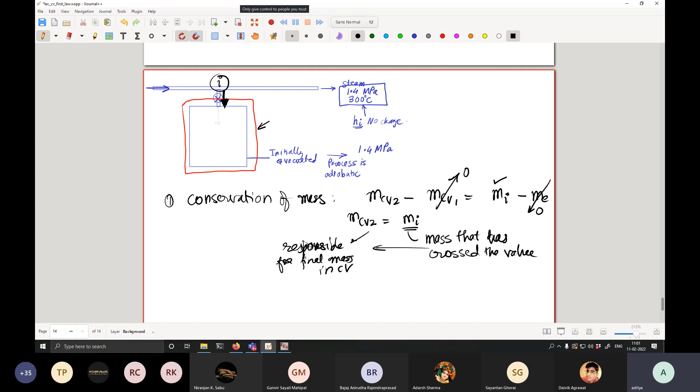So whatever mass is coming in through the pipeline, this is the inlet condition. Whatever mass is coming in through this point, it is going to be responsible for the mass collected in the control volume. Mass that has crossed the valve is responsible for the final mass in the control volume. Is this clear? This is very straightforward.

Hello? Yes, sir. Sure. So let me just put it over here. So conservation of mass is trivial.

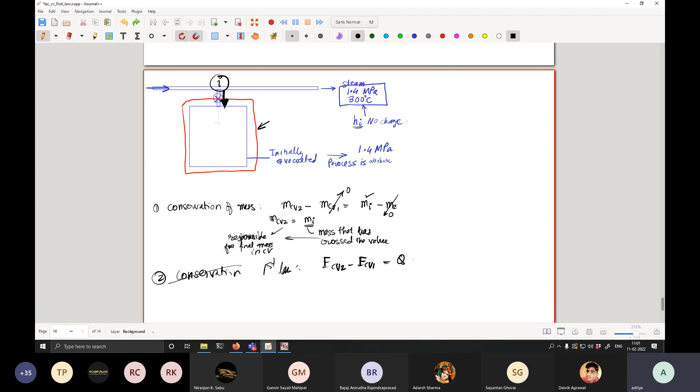Very good. Second step, conservation of energy, or first law. So you have ECV2 minus ECV1 is equal to all the heat transfers to the system minus all the works done by the system plus mi hi total minus me he total.

Is there any work done? No, there is no boundary work, no shaft work. Is there any heat transfer? No, because the process is adiabatic. Is there any exit mass? No, Me is 0. Was there anything inside the control volume initially? No, it was evacuated.

So we have ECV2 is equal to Mi Hi total, and ECV2 is equal to mCv2 times ECV2. So ECV2 is equal to U plus half VCV square plus GZCV, and HI total is HI plus half VI square plus GZI.

But in the problem it is given that we neglect the kinetic energy and potential energies. So neglect all this. Finally, what do we get? From this expression equal to this expression, we have mCv2 times U2 is equal to Mi Hi.

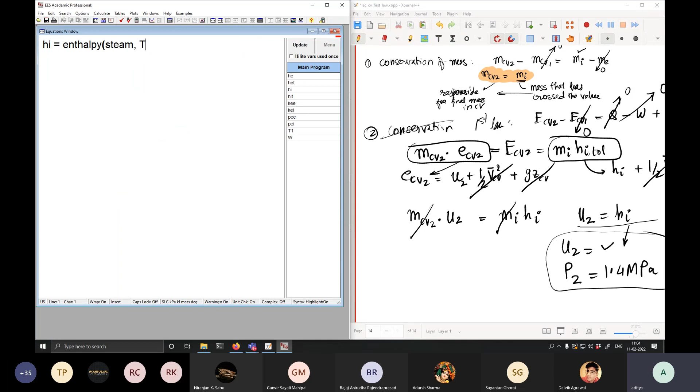So now I know that U2 will be something corresponding to HI, and I know that the final pressure is 1.4 megapascal. I have two state points known, so I should be in a position to figure out what the final temperature is. So I will say that HI is equal to enthalpy of steam at 300 degrees Celsius and P equal to 1400, and this is going to be U2.

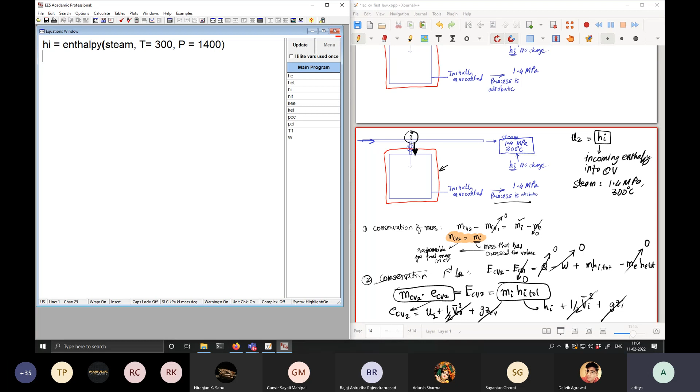So this is the internal energy of the system when the valve is closed, after letting it fill. But I know what P2 is. P2 is 1400. Then I can simply fetch what is T2: temperature, steam, P equal to P2, U equal to U2. And the final temperature is 452.3 degrees Celsius.

So T2 comes out to be 452.3 degrees Celsius. So what does that mean? After the filling process, when you fill the tank from a pipeline, the pipeline temperature is 300 degrees Celsius, but due to filling into a constrained volume, the temperature actually increases.

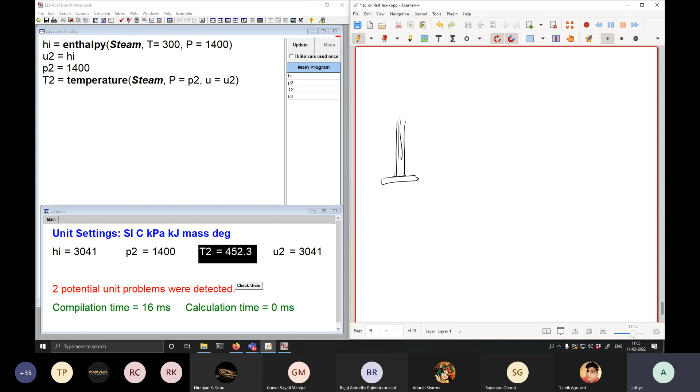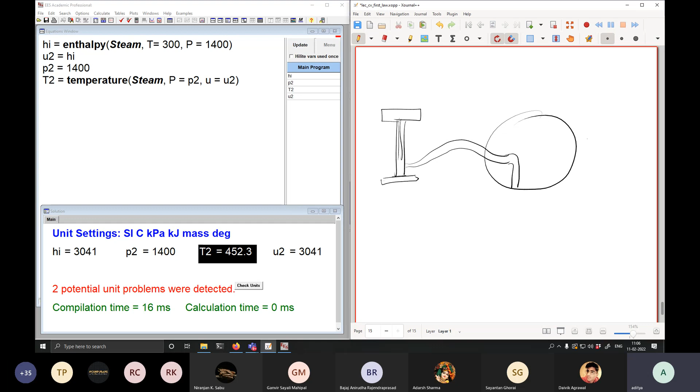And if you are a very observant person, you will see that when you fill air into your bicycle tire also, the tire becomes warm slightly because you are filling air into a closed volume. You are pushing more and more air into a closed volume, so the temperature increases.

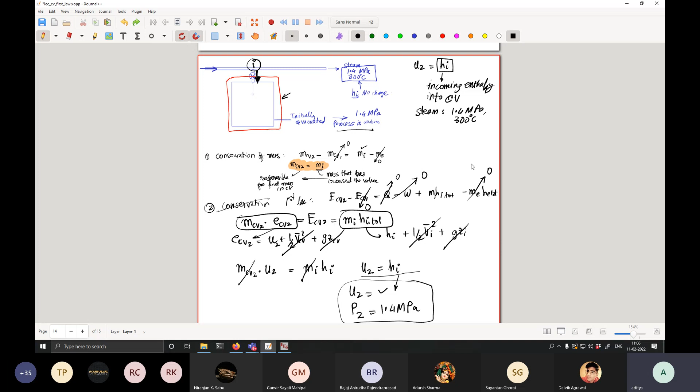This is a very important class of problems. This kind of analysis is very true for many industrial processes as well. But am I able to convince you that these problems are not difficult? Rather, they're rather straightforward. There's nothing much going on. You must clearly identify what is the mass coming in, what is the mass going out, what is the energy coming in, what is the energy already there.